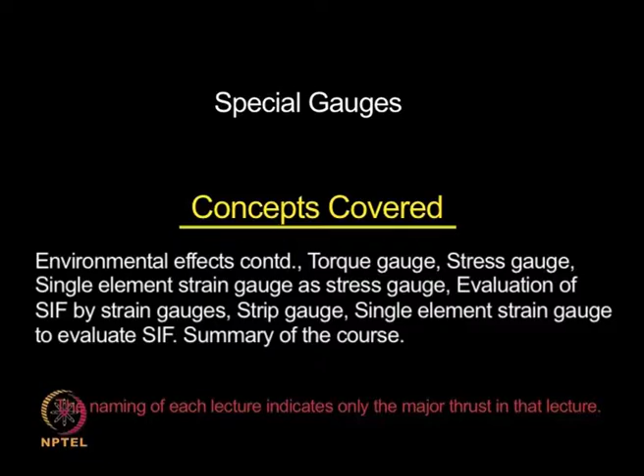We have been looking at finer aspects of strain gauge instrumentation systems. In the last class we looked at how to account for transverse sensitivity in a general case, then how to effect these corrections in the case of a T rosette, rectangular rosette, as well as delta rosette. Then we moved on to how to make strain measurements under hydrostatic pressure, nuclear radiation, temperature extremes, and cyclical loading, and finally we looked at environmental effects.

I said water is elixir of life, but water is very bad for strain gauge installation. We saw strain gauge installation needs to be protected against moisture. So when you learn that it has to be protected against moisture...

One of the simpler approaches is to apply a thin layer of microcrystalline wax or an air drying polyurethane coating, and this is good enough for laboratory measurements where your readout time is essentially short.

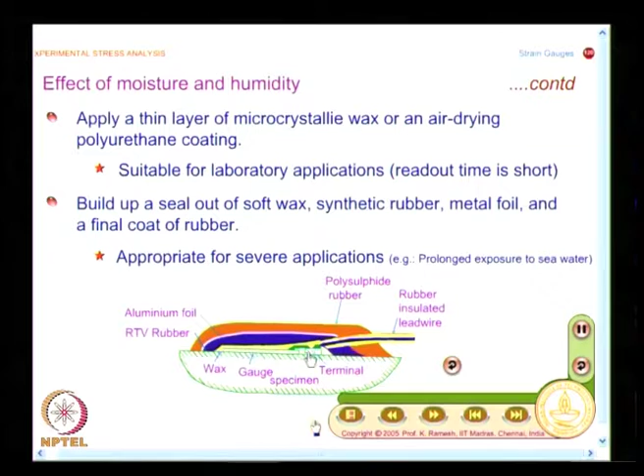I would like you to have a neat figurative sketch of this. So what you essentially have is, on the specimen you have the gauge, then a coat of wax, then a coat of rubber, then aluminum foil, and a final coat of polysulfide rubber. This also you can see as animation where you see one layer after the other.

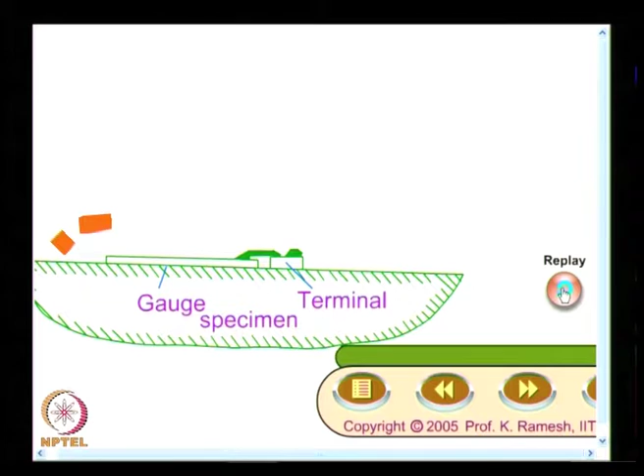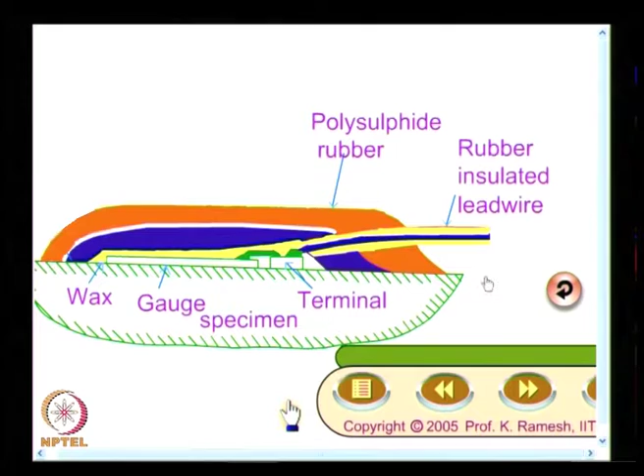Now we move on to an interesting class of special gauges. First we take up plane shear or torque gauge, and what we are going to do here is look at a very generic arrangement. In this you have two strain gauge elements oriented at angles theta A and theta B, and you have the reference axis as x and y.

So you have one strain gauge element measuring strain along theta equal to theta A, and another strain gauge element measuring strain along theta equal to theta B. We will develop the equation for a very generic arrangement first, then substitute specific values of theta A and theta B and simplify.

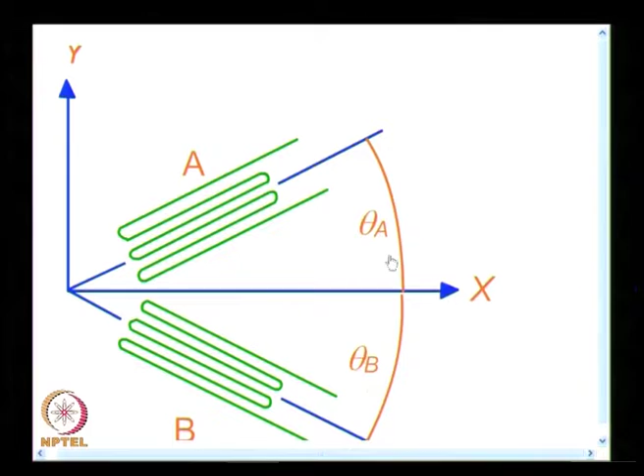In all these approaches, I have said you need to know the strain transformation law. If you know that, analysis of strain gauge data is very simple. Here the strain transformation law is written down in terms of cos 2 theta and sin 2 theta, instead of cos square theta, sin square theta in that form; we have written it in another convenient fashion.

So when I have a strain gauge oriented at theta equal to theta a, epsilon a is given as epsilon xx plus epsilon yy divided by 2, plus epsilon xx minus epsilon yy divided by 2 into cos 2 theta a, plus gamma xy divided by 2 sin 2 theta a.

And you simply replace theta a with theta b in the second expression, and my focus is to find out the shear strain.

So from these two expressions I can solve for the shear strain gamma xy, and that is finally given as gamma xy equal to 2 into epsilon a minus epsilon b, minus epsilon xx minus epsilon yy multiplied by cos 2 theta a minus cos 2 theta b, divided by sin 2 theta a minus sin 2 theta b.

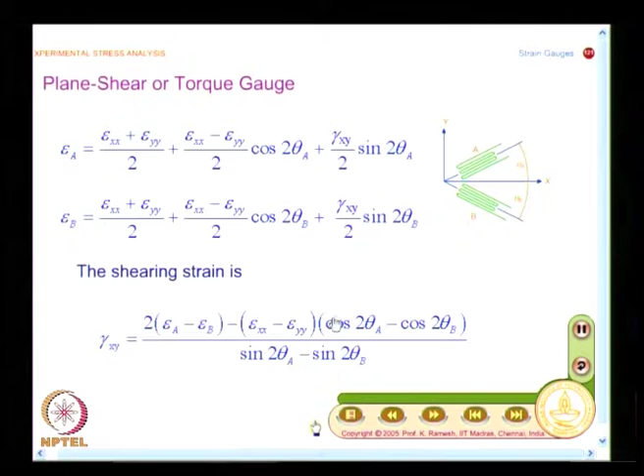What I am going to do is take the first step: I will make theta a equal to theta b in magnitude, and if I have theta a equal to minus theta b, then you will find cos 2 theta a minus cos 2 theta b will go to 0. So you will have only one term in the expression for gamma xy.

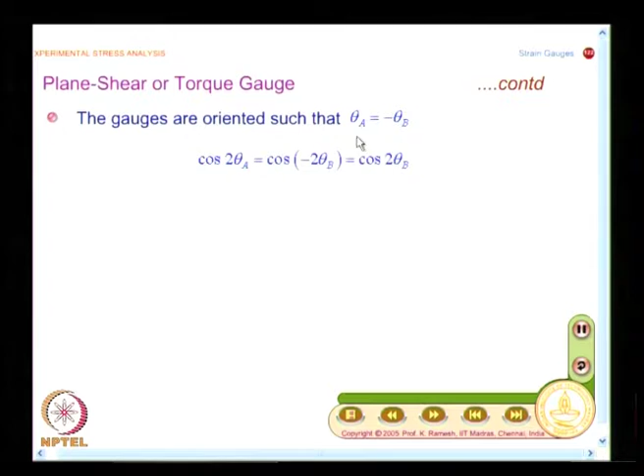So when I have theta a equal to minus theta b, I get gamma xy as epsilon a minus epsilon b divided by 2 sin 2 theta a.

In normal strain gauge measurements, you connect one strain gauge to a Wheatstone bridge. Only in special applications you may connect more than one strain gauge. Suppose I use a delta rosette or a rectangular rosette.

Essentially, I would connect each strain gauge in a rosette to separate Wheatstone bridges for strain measurement. Now here, what you are looking at is, I will connect two strain gauges, they may form a T rosette, and when connected on adjacent arms, we have already seen adjacent arms cancel each other. If the angles are oriented at theta a equal to minus theta b, connecting two strain gauges on adjacent arms of the bridge automatically gives you epsilon a minus epsilon b.

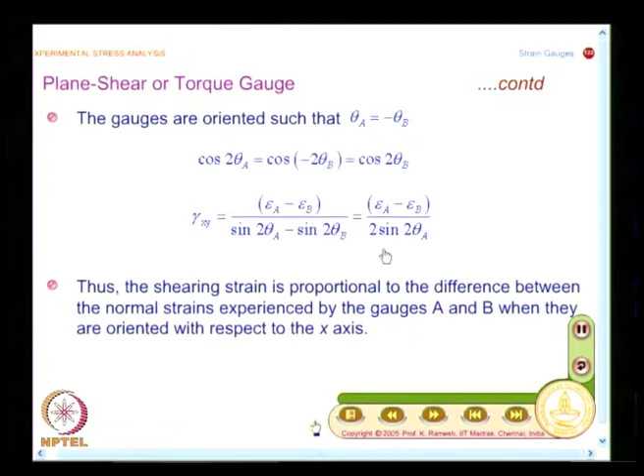So what you essentially get is the shearing strain at the point of interest. I can take a very special case when I keep theta a equal to 45 degrees, I get a much simpler expression, and that is how most of these popularly available strain gauges are oriented. So what I get is gamma xy equal to epsilon a minus epsilon b divided by 2.

So I have a T rosette and I connect the two elements of this to one Wheatstone bridge. This is a special application. Here we are not measuring the state of strain at the point of interest, we are interested only in finding out shear strain, nothing else. In such a case, you can connect elements of the rosette to appropriate arms of the Wheatstone bridge. So this is a special application, it is not a general rule.

In a generic case, you will connect each strain gauge to a Wheatstone bridge. Only in transducer applications, where you design your spring element and know the state of strain on it, your focus is to measure force. In order to amplify the signal, you try to have a minimum full bridge configuration.

So you have to distinguish, in strain gauge instrumentation, how to connect the strain gauges and how many channels you require. You need planning, and you need to bring in concepts of strength of materials, so that you place the strain gauge properly on the structure as well as connect them correctly in your Wheatstone bridge. So do not assume that because in one class we saw two strain gauges connected to a Wheatstone bridge, this applies for every other application.

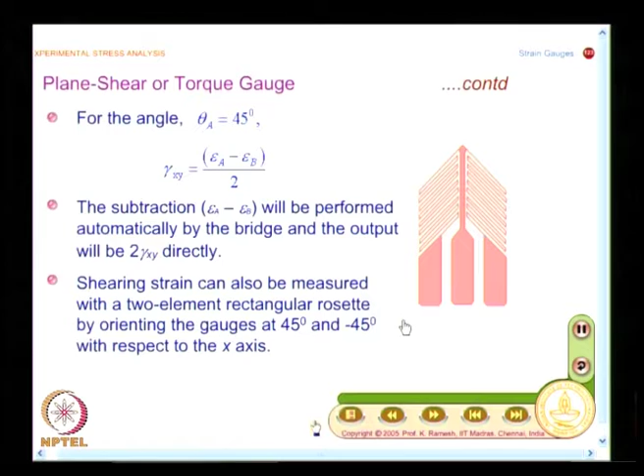You also have different configurations available. Instead of just 2 strain gauges, you have 4 strain gauges oriented at 45, minus 45, 135, and so on. Here you will get 4 times the signal, and these are all special gauges which can be used to measure the value of torque. If you calibrate it properly, you can also measure the torque applied to the structure. So in these applications you will connect all these strain gauges appropriately in a single Wheatstone bridge.

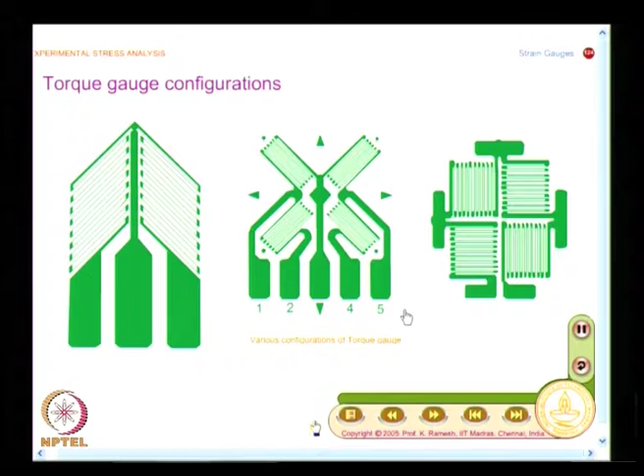We have seen how to measure shear strain. People also asked a question. In basic stress analysis, we are only looking at evaluation of stress components, so why not also design a stress gauge instead of a strain gauge? The focus is that whatever measurement I get should be proportional to stress, then it becomes a stress gauge.

We have looked at transverse sensitivity effects as a nuisance, and I said what you considered a nuisance in one application can become beneficial in another. That is the case with friction. Without friction you cannot walk on the street, and you need to minimize as much friction as possible in many of your rotating components. And if you do not have friction, you cannot apply brakes.

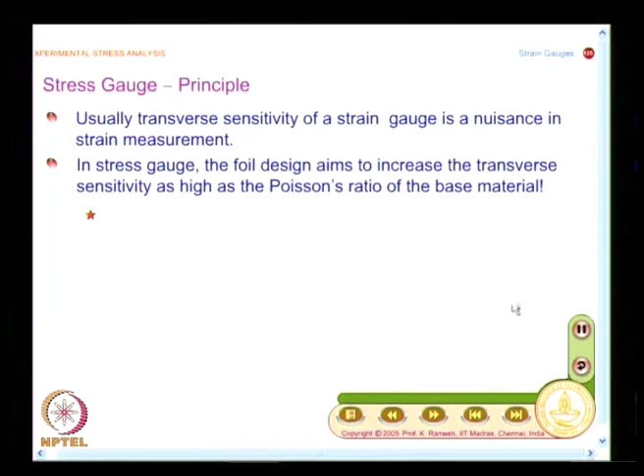So friction is advantageous as well as disadvantageous. On similar lines, we will see in the design of the stress gauge how we play with the transverse sensitivity. In fact, we would like to have maximum transverse sensitivity so that a given strain gauge functions like a stress gauge. Transverse sensitivity of a strain gauge is a nuisance in strain measurement, but in a stress gauge, the foil design aims to increase the transverse sensitivity as high as the Poisson's ratio of the base material.

So what happens is, in view of this, the stress gauge will be different for different specimen materials. This we have already accepted in strain gauge technology. We have looked at self temperature compensated gauges, and all these are meant for a particular specimen material. So we are accustomed to this kind of scenario in strain gauge technology, and you extend a similar argument for the development of these special gauges too.

I have given the result in advance, but we will see how the result is arrived at. So, let us look at the expression for delta R by R, what we looked at earlier.

We will recall here, that is given as S A into epsilon A plus K T into epsilon T. We have not written it in terms of S G, we have written the generic expression here.

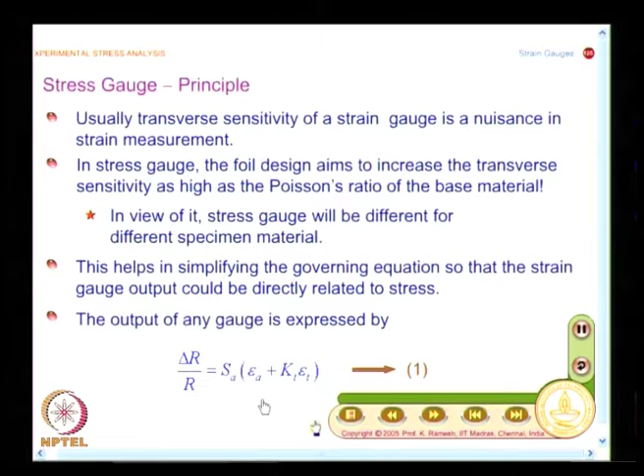And now we are essentially trying to find out the state of strain or state of stress on a free surface, and we consider that as a plane stress situation. So, I can replace the strain quantities in terms of stress components by invoking stress strain relations. That is what I am going to do.

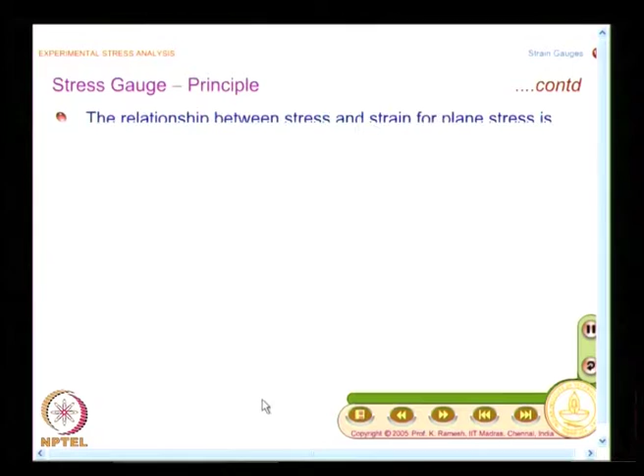So, when you look at the relationship, I have epsilon A equal to 1 by E into sigma A minus nu times sigma t, and epsilon t is given as 1 by Young's modulus E into sigma t minus nu times sigma A. When I substitute in the previous equation, I get delta R by R equal to sigma A into S A divided by Young's modulus into 1 minus nu k t, plus sigma t S A divided by Young's modulus E into k t minus nu.

So, delta R by R is a function of axial stress as well as transverse stress. Suppose I make k t equal to nu, this term vanishes.

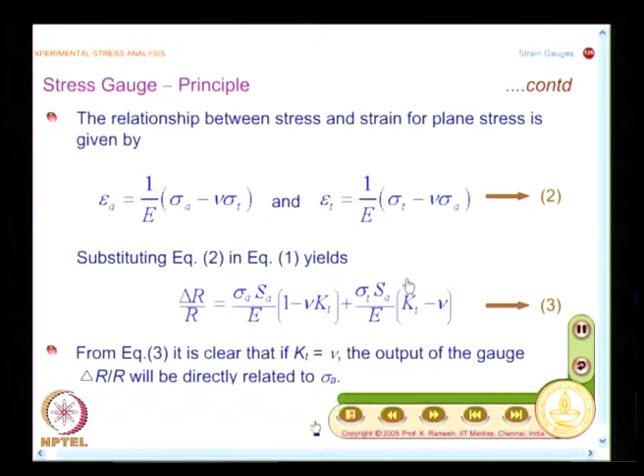So, what you are really looking at is, in a strain measurement system, I essentially measure change in resistance. Now, we have looked at delta R by R could be related to axial stress, provided the gauge configuration has a transverse sensitivity of a very high value equal to the Poisson's ratio.

See, we are not taking a wire and making a strain gauge now. We have the luxury of etching any pattern of my design on a metal foil. Because I have the etching process, I can design complicated patterns. In fact, the diaphragm gauge which you saw was a very complex pattern which was used to measure pressure.

So, now we will have to go and investigate what type of grid pattern I should design which will have transverse sensitivity of the order of Poisson's ratio. That is what we are going to look at.

So, look at this diagram very carefully, and there is a subtle difference between what we saw as a torque gauge and what we say as a configuration for the stress gauge. Here also I have two elements oriented at plus theta and minus theta, but the subtle difference is, these two elements are joined, they are not independent elements.

So, I have one strain gauge which is made in a fashion having two elements which are joined. So, the whole thing is one strain gauge. So, I will have one tab here, I will have another tab here. This has to be connected to the Wheatstone bridge.

And I have also cautioned earlier, you must develop a familiarity by looking at a pattern what this gauge stands for. In fact, you will also be tested whether you have been able to identify strain gauge patterns of various types, that will be tested in your examination, and you should not get confused between a T rosette or two element strain gauge or a stress gauge. There is a subtle difference, the subtle difference you should understand. The elements are joined here, and this is how you have made a stress gauge.

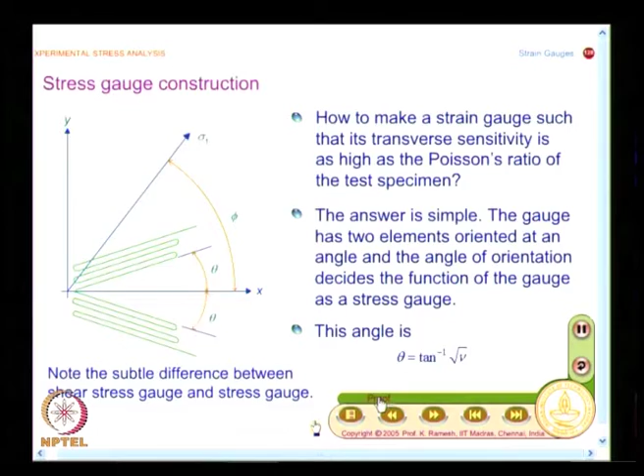And when I do the mathematical development, I will refer these two angles with respect to the principal stress as the reference. So, I will have one as phi minus theta, other one as phi plus theta, and again you have to go back and look at the strain transformation law. That is what I am going to do. These equations are not difficult, these equations you already know, only aspect is we are applying it for a different strain gauge configuration.

So, I have two elements that we are going to look at, because they are joined together essentially. I am looking at epsilon phi minus theta plus epsilon phi plus theta, that is what I am going to finally do. So, I will look at what is the expression for epsilon phi minus theta.

Since I have taken reference as the principal stress axis, I write it in terms of principal strains. So, epsilon phi minus theta equals 1 by 2 epsilon 1 plus epsilon 2 plus 1 by 2 epsilon 1 minus epsilon 2 multiplied by cos 2(phi minus theta). You can appreciate this because it is like a normal strain gauge which is sensitive to strain along the gauge length, so that you call epsilon phi minus theta.

Similarly, this is like another strain gauge which will measure strain along the gauge length, so that is denoted as epsilon phi plus theta. So, you change theta from minus theta to plus theta.

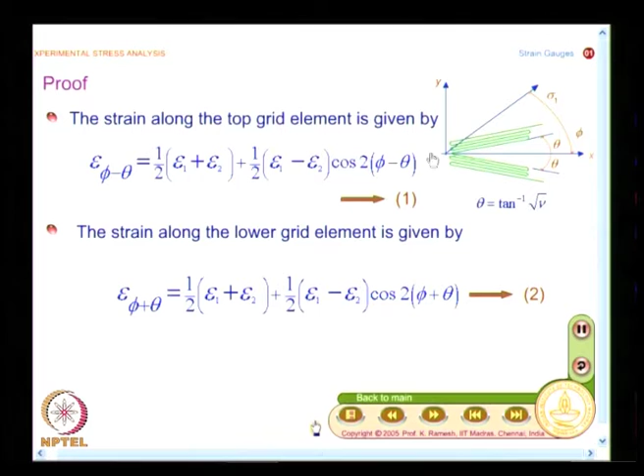In strain gauge instrumentation, we design complicated gauges, but finally we will also raise a question: can I do stress measurement with a single conventional strain gauge? If you look at the theoretical development, I have cleverly taken the principal stress axis as a reference. Note that if phi equals 0, the expressions for epsilon phi minus theta and epsilon phi plus theta will be exactly the same. Keep this result in mind, we will use it when I develop whether a single element strain gauge could be used to measure stress. So we will develop a complicated gauge pattern to start with. In an unknown situation you will do this, but you will also find out whether you could use a simple normal strain gauge for stress measurement.

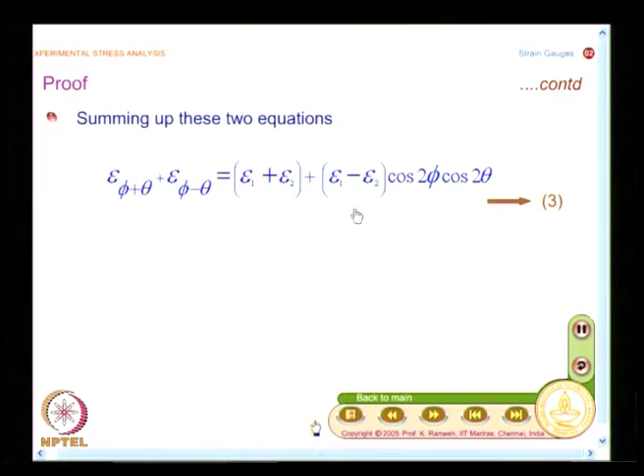When I add these two strain quantities, I get epsilon 1 plus epsilon 2 plus epsilon 1 minus epsilon 2 multiplied by cos 2 phi into cos 2 theta. I will further simplify, my focus is finally to get the addition of these two strains proportional to a single stress component, that is what I am going to show. We will not evaluate the angle theta, but we will say theta equals so and so, and then simplify the expression.

Then we will say take theta equal to tan inverse root of nu, as we have said, and we will do it by induction. We also know from Mohr's strain circle that epsilon xx plus epsilon yy equals epsilon 1 plus epsilon 2, and epsilon xx minus epsilon yy equals epsilon 1 minus epsilon 2 into cos 2 phi, and we will replace it in terms of epsilon xx and epsilon yy.

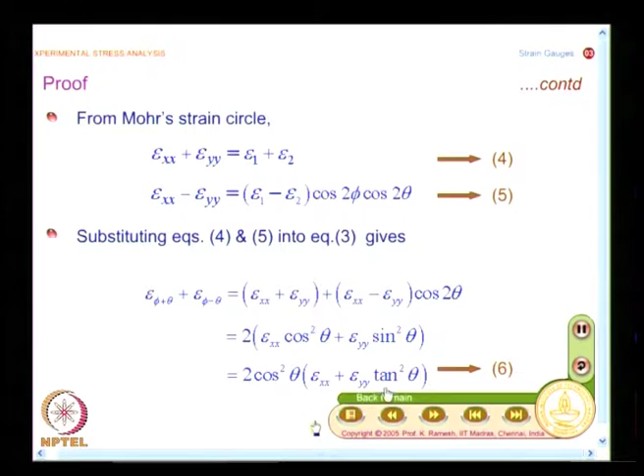So, when you substitute these into the earlier equation, I get epsilon phi plus theta plus epsilon phi minus theta as epsilon xx plus epsilon yy plus epsilon xx minus epsilon yy cos 2 theta, and finally it simplifies to 2 cos squared theta times epsilon xx plus epsilon yy tan squared theta. What we have done is simplify the expressions the way we want. The focus is for what values of theta this expression gets simplified, and that is what we will take up now.

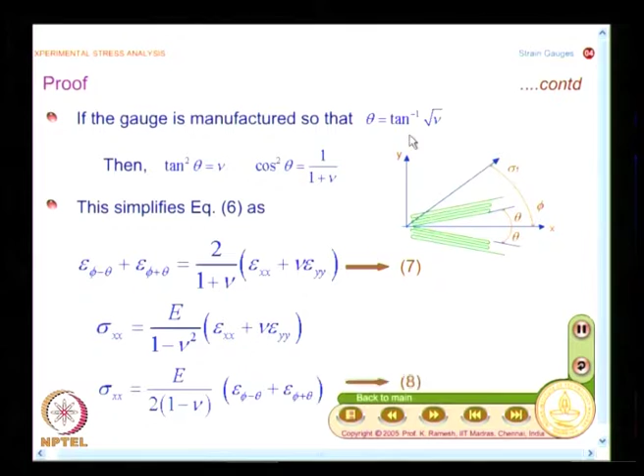We start with the premise that if the gauge is manufactured so that theta equals tan inverse root of nu, I specify what is the expression for theta. So when I take theta equal to tan inverse root of nu, I get tan squared theta equal to nu and cos squared theta equal to 1 by (1 plus nu), and this simplifies epsilon phi minus theta plus epsilon phi plus theta equal to 2 by (1 plus nu) times epsilon xx plus nu times epsilon yy.

And I get an expression for sigma xx as Young's modulus E divided by (1 minus nu squared) multiplied by (epsilon xx plus nu times epsilon yy). So I finally get sigma xx related to epsilon phi minus theta plus epsilon phi plus theta through the factor E by 2 into (1 minus nu). What we have seen is, I have two elements joined together, and when you connect this in one arm of the Wheatstone bridge, I measure essentially the sum of these strains. Now I have an expression to find the normal stress sigma xx directly from strain measurement, so I call it a stress gauge, only the multiplication factor has to be reset in your instrumentation system.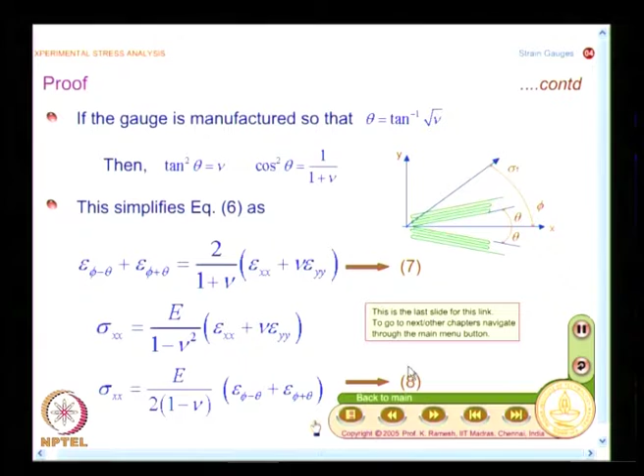I am not going to stop here, you cannot run for a stress gauge. We have also seen the stress gauge is dependent on the base material because of the factor Poisson's ratio. Because I have the factor as Poisson's ratio, it depends on the base material. So I need to develop how to use a single element strain gauge as a stress gauge.

See, all this are gimmicks, once you have understood something, you orient it at a particular angle and get the result you want. For this, I need to know the principal stress direction. Without knowing the principal stress direction, I cannot use a single element strain gauge to measure stress. There are certain applications where you can minimize the number of channels by just pasting one strain gauge appropriately.

If your design demands a stress quantity along a particular direction, then your job is done. So the prerequisite is I need to know the sigma 1 direction, and I will have to align a simple normal strain gauge at theta, where theta is given as tan inverse root of nu. We have already noted, when phi equals 0, epsilon phi minus theta equals epsilon phi plus theta, that is equal to epsilon theta. So your final expression reduces to sigma 1 equals E by 1 minus nu, times epsilon theta.

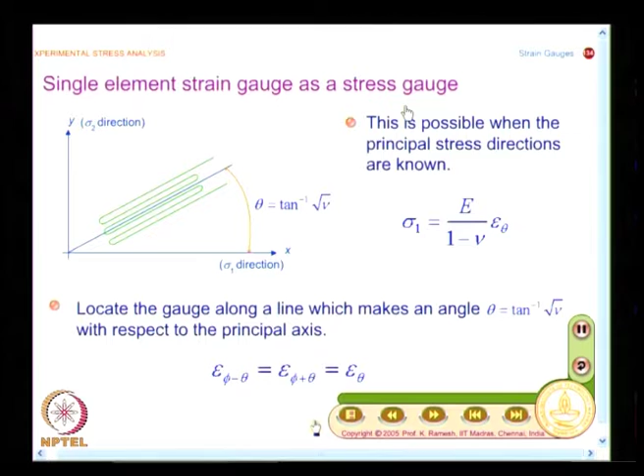So now you have a via media. If somebody asks you why are you doing only strain gauge, you can say no, I can also develop a stress gauge. This is one of the very common questions in interviews - people can ask, do you know what is a stress gauge? You should not stay quiet, you should say that there is a way to do it.

These are all recent developments. People played with metal foil where you have to etch. If they had to live with the wire, probably they would not have proceeded in this direction, because you have the facility to etch any pattern of your desire, whatever design you have, you are in a position to explore and find innovative methods to improve your measurement.

And what we have done here, if you look at the stress gauge, we have selected a particular parameter so that one of the terms becomes zero. You have this idea borrowed even in fracture mechanics. My next focus is to find out how to get the stress intensity factor using strain gauge technology.

First we will see a very elaborate method, then we will simplify it. In order to simplify, we have to knock off terms, and we are going to knock out 2 terms in a series. So I will have to work with theta as well as alpha. In this case we have to knock out only one term, so we decided that we will align it at angle theta.

So the ideas are similar, people also played with Poisson's ratio. Once you have got the Q, researchers try in that direction and find out how this can be further exploited. So you would see Poisson's ratio is effectively utilized in the calculations, and the orientation decides the functionality of the strain gauge, and I have to knock out 2 terms, theta as well as alpha. That is the way I am going to go about it.

But before we go into it, we will also recall what we have learned in our course on fracture mechanics. What is the stress intensity factor? Essentially, the stress field in the vicinity of the crack is possible to write in terms of the stress intensity factor, and you may have multiple cracks in a system. The crack that is critical is going to propagate, and fracture mechanics says that when K1 is greater than the fracture toughness, K1C, the crack will be initiated.

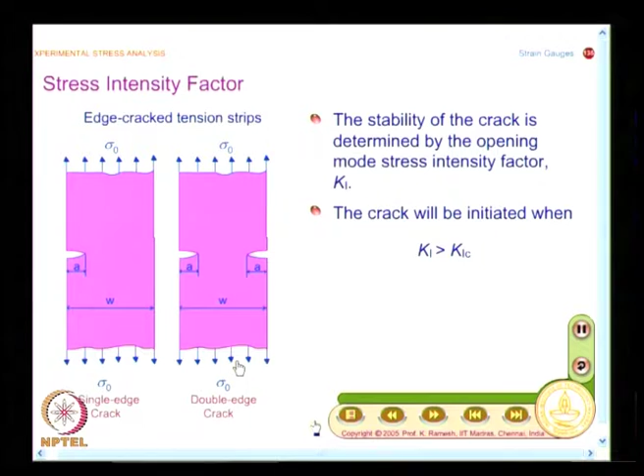So the focus is, for a given structure you need to find out what is the stress intensity factor. Here we are essentially looking at a simple mode 1 situation. So the idea is, there are occasions where you need to experimentally find out what is the stress intensity factor.

There are many methods: you can do it by numerical methods, by method of caustics, by method of photoelasticity, by method of Moire, holography, and we will learn how strain gauge technology could be used. So what do I need to do?

Now you all know I am going to paste a strain gauge at an arbitrary angle. So I need to find out, for an arbitrary angle, what is the expression for strain. If I know the expression for epsilon xx, epsilon yy and gamma xy, I can write down the strain expression along any axis of interest. That is not a difficult aspect.

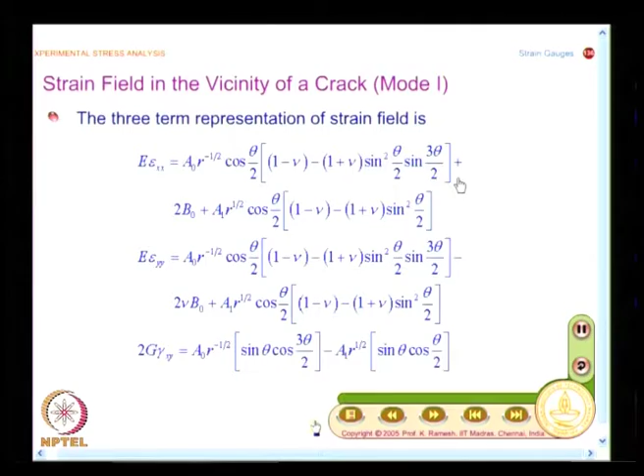So essentially you have to look at the strain field, and in order to have reasonable accuracy I am taking a 3 term solution. I can write an infinite number of terms, but those terms I will not be in a position to evaluate, and you should also not stop at only the first term. So in order to enhance accuracy we want to take as many terms as possible, and the methodology should also be simple enough to measure.

So my focus is to bring in 3 terms, but knock off 2 terms intelligently by selecting appropriate angles. That is what I am going to do.

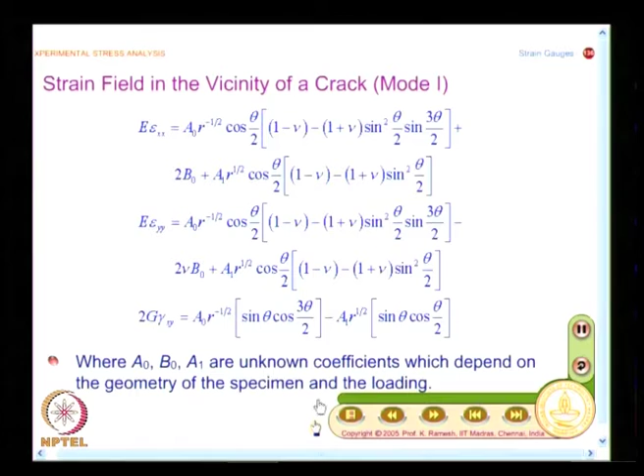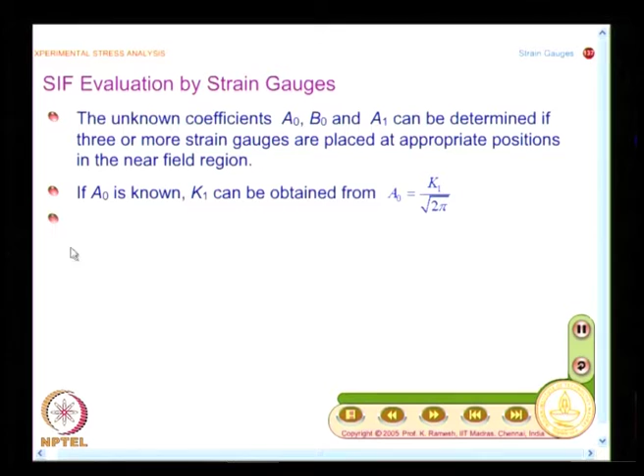This is what is summarized here: you have A naught, B naught, A1 as unknown coefficients which depend on the geometry of the specimen and the loading, and we will knock off other terms leaving only A naught. If A naught is known, K1 can be obtained from A naught equal to K1 by root of 2 pi. This is what I am going to aim at.

And if you are confronted with a situation like fracture mechanics, what you would like to do is measure at several points in the vicinity of the crack tip, find out strain quantities, and in such a case you normally have to paste strain gauges at different locations.

And even to solder and connect and paste, all these are very complex issues. But the advantage is you are able to get strain at short distances very comfortably.

So I can essentially get the strain field, and in fact people have developed methodologies using strip gauges to find out the strain field and solve this in an over-deterministic fashion using the principle of least squares, and you can actually evaluate several terms in the series and finally evaluate only the stress intensity factor.

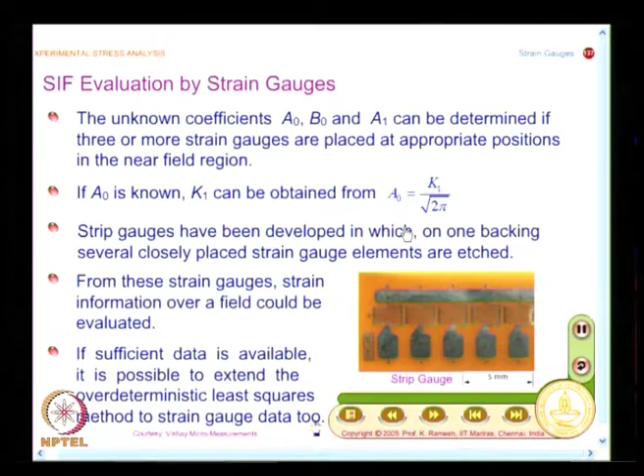So you could satisfy the strain field information by pasting several strip gauges in the near vicinity, but the very thought is so difficult, because it is available as one backing - pasting may be simpler, but soldering is going to be a very tricky issue.

That is where you will find that whole field techniques are better. When I have to get field information, whole field techniques are a lot more better, but you also need to have a via media. When I use a strain gauge, is it possible to get the strain field? If you ask that kind of question, in principle it is possible, but you have to take a lot of effort to do that.

And this is where researchers have stepped in and played with the equations and found a very simple approach where a common general purpose strain gauge, a single strain gauge, could be used to find out the value of K. How elegant it is, we will have a look at it.

The idea here is the number of strain gauges required for the determination of K1 can be reduced to 1 by appropriate choice of strain gauge location and orientation. Essentially my interest is to knock off B naught and A1 terms. So I look for two orientations. You are trying to find strain along a particular location which is at an angular location, and at that location you measure strain along a particular orientation. So I have two parameters to play with, and I can have the governing equation only as a function of A naught.

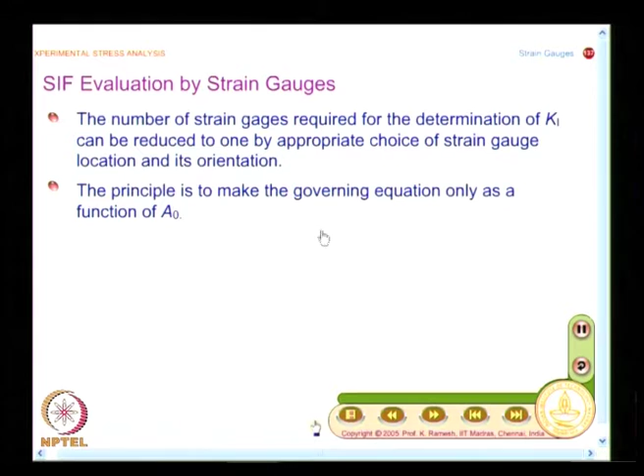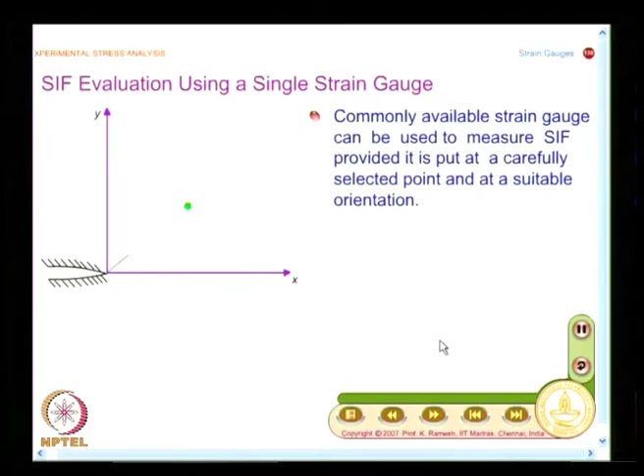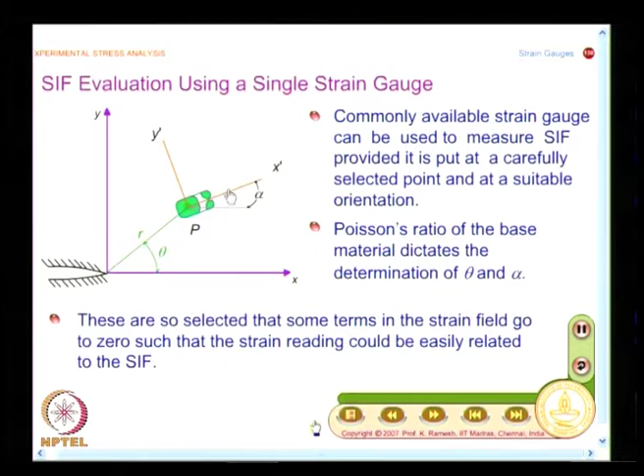Look at the animation carefully. What I am going to do is use the common strain gauge. I will have the orientation theta, but at orientation theta I will have the strain gauge aligned at angle alpha. For this value only I would find the strain along this direction, and now the question is how to select theta and alpha. That is what we will look at.

Make a neat sketch of this diagram that illustrates how to use a single strain gauge for stress intensity factor measurement. I have this as the crack tip, taken as the origin, and you locate the point P which is at an angle theta from the crack axis. At point P you measure strain along the direction alpha, that is very important.

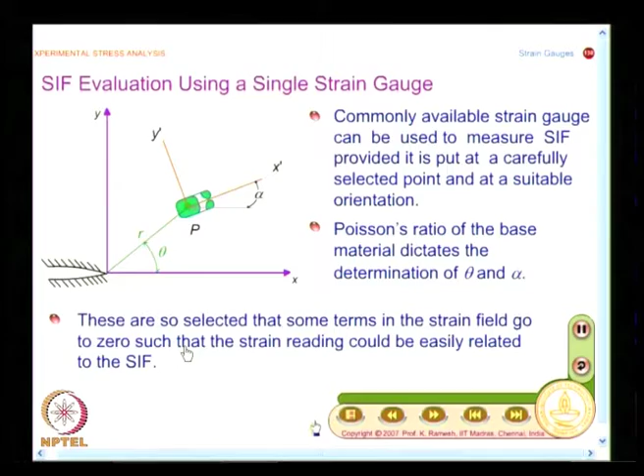I have already given you the clue, we have the Poisson's ratio of the base material which was used in designing the strain gauge. We will extrapolate those ideas and use the Poisson's ratio of the base material to find appropriate values of theta and alpha, so that some terms in the strain field go to zero. You have to evaluate theta and alpha intelligently to knock off the terms containing B naught and A1.

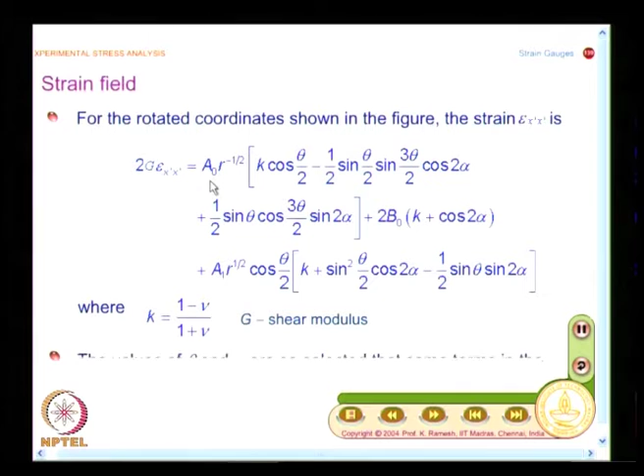So I will have an expression only in terms of A naught, then I can find the stress intensity factor from that. For this I need to know the strain along any arbitrary direction. This expression you can write down: 2G into epsilon x prime equals A naught r power minus 1 by 2 multiplied by kappa cos theta by 2 minus 1 by 2 sin theta by 2 sin 3 theta by 2 into cos 2 alpha, plus 1 by 2 sin theta cos 3 theta by 2 sin 2 alpha, plus 2 B naught k plus cos 2 alpha.

Now you have a clue how to find alpha. This should be minus kappa. If I have this as minus kappa, then this term will go to zero. So find alpha and then find theta, that is how you play with the equations. I have this as plus A1 r power 1 by 2 into cos theta by 2, kappa plus sin square theta by 2 cos 2 alpha minus 1 by 2 sin theta sin 2 alpha.

Once you look at the expression for the strain, for the strain gauge which we have pasted, we have it in terms of theta and alpha, and you get a clue how to get the values of alpha as well as theta. Kappa is given as 1 minus nu divided by 1 plus nu, and g is the shear modulus.

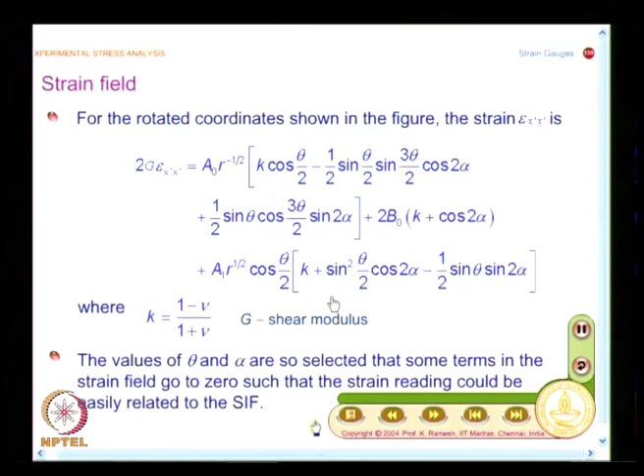Whatever development you have done in strain gauge, playing with the Poisson's ratio and orienting the strain gauge appropriately, that kind of approach is extrapolated in the measurement of stress intensity factor also. Once you strike an idea, you also find out whether this idea can work in other situations.

Now I have an expression, I can go and find what is the expression for alpha and theta. We have cos 2 alpha equal to minus kappa, so you have minus of 1 minus nu divided by 1 plus nu. So I can find the value of alpha, and if you look at the expression for A1, that vanishes if angle theta is selected such that tan theta by 2 equals minus cot 2 alpha.

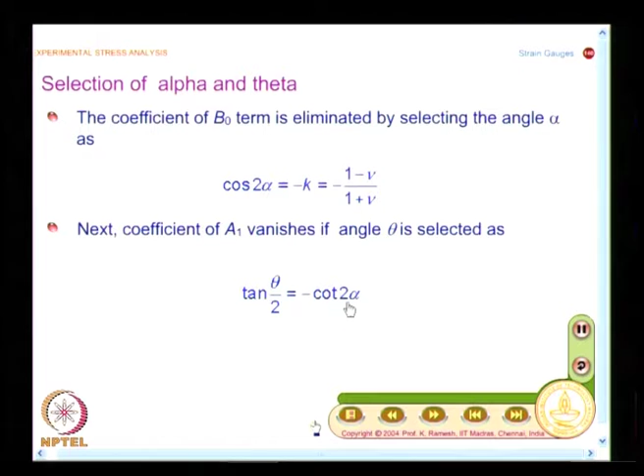See, you have the strain expression, and when you substitute these values of alpha and theta, you will find it is only a function of A naught; the terms containing B naught and A1 are cleverly knocked off. So, you play with the angles and you are able to do it.

These are all finer aspects of strain gauge instrumentation. When you normally place a strain gauge, you are only measuring strain along a particular direction. Whatever strain you measure is intelligently related to the stress intensity factor by your understanding of the strain field expression. And if alpha and theta come out as 22.32 degrees and 32.5 degrees, nobody will use it.

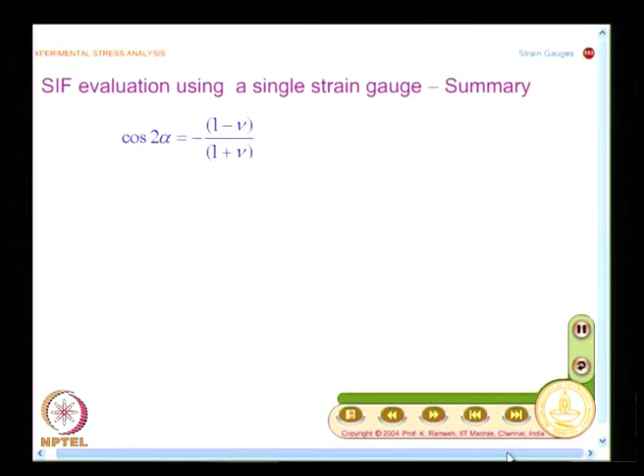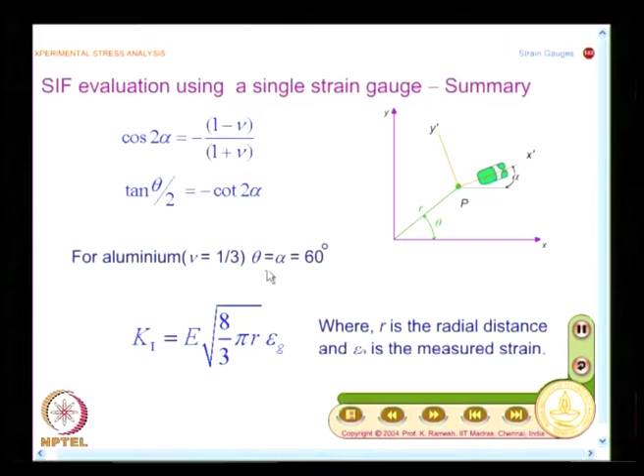See, people find this a great use mainly because the most popular aerospace material is aluminum. For aluminum, both angles reduce to 60 degrees. It makes your life very, very simple. So, that is what we will see now. When I have aluminum, nu equal to 1 by 3, and theta and alpha go to 60 degrees. The angle is very important. If the angle is not possible to achieve, this technique would not have taken off. And aluminum is the one used in space structures. All aerospace structures, that is where maximum experimentation is done, because safety is a very important aspect. And you find, fortunately, the values of theta and alpha are as simple as 60 degrees.

This is a generic arrangement. You have to look at theta as well as alpha in a generic situation, and when I have this, the final expression is also available. So, what I have here is k1 equal to Young's modulus E into root of 8 by 3 pi r, epsilon g, where epsilon is the strain along the particular direction.

For the case of aluminum, this is measured for the values of theta as well as alpha equal to 60 degrees. For steel, you will have to find out theta and alpha, because knowing the Poisson's ratio, you can find out what is theta and alpha. So, if you orient this, then you have an expression for the stress intensity factor.

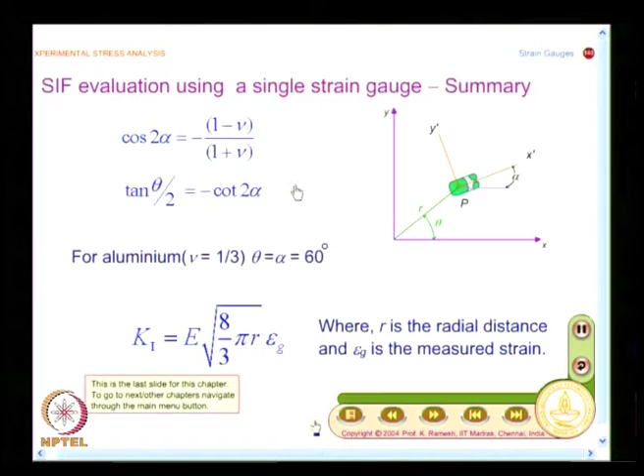So, with this we come to the close of this course, and we will also have a look at a brief overview of what we have been discussing in various chapters.

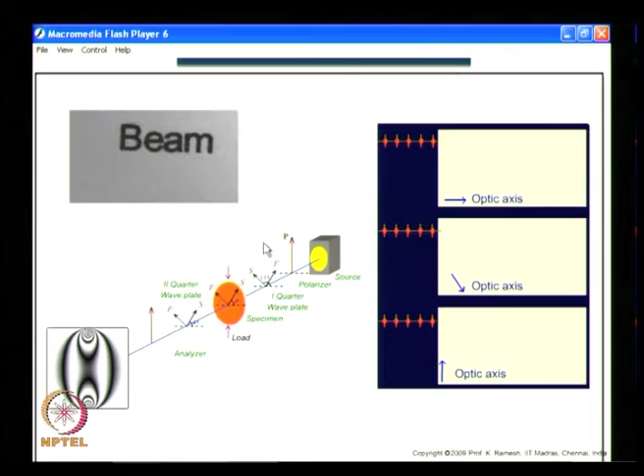We started with transmission photoelasticity. The key concept was that when you have a model that is loaded, it behaves like a crystal when it is loaded. When the loads are removed, it behaves like a normal material, and a crystal exhibits a property of birefringence, which is exploited in photoelasticity, allowing you to view fringe patterns in different optical arrangements.

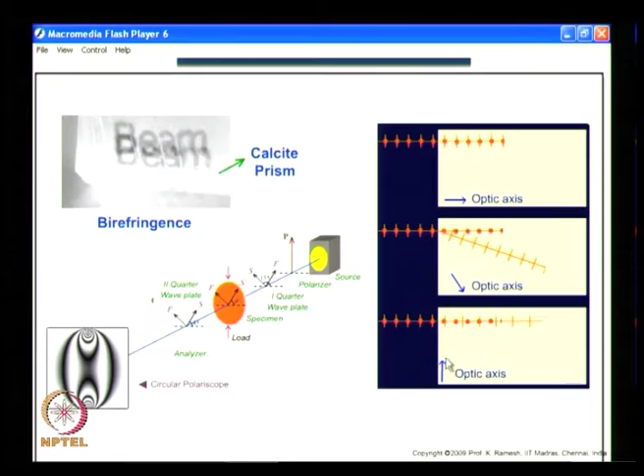Here you have a circular polariscope, where both a dark field and a bright field are possible, and we also discussed how the incident light should be oriented with respect to the optic axis of the crystal. When it is perpendicular, it is useful in photoelasticity, and when you have an incident ray, you get two refracted rays traveling with different velocities.

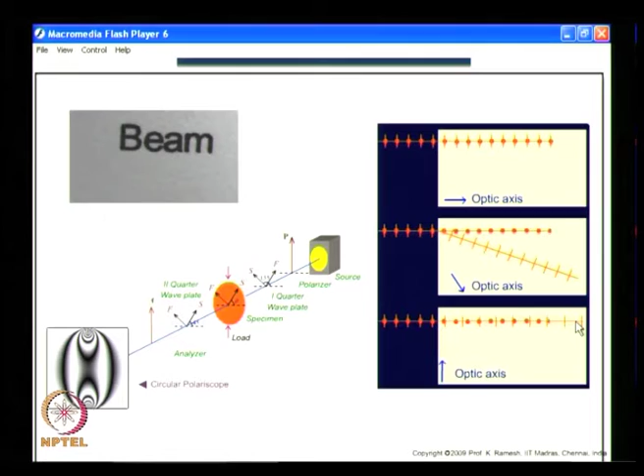So that is the basic physics in transmission photoelasticity, and we said we also need methodologies to analyze prototypes, which was discussed in photoelastic coatings. I said all the coating techniques share a commonality. We have photoelastic coatings, brittle coating, and to an extent you can also think of strain gauge as a coating applied on the material, and one key concept is that the strain in the prototype is faithfully transferred to the coating.

In the case of photoelastic coating, you have a thickness of the order of 3 millimeters pasted on, so you necessarily need what are known as correction factors.

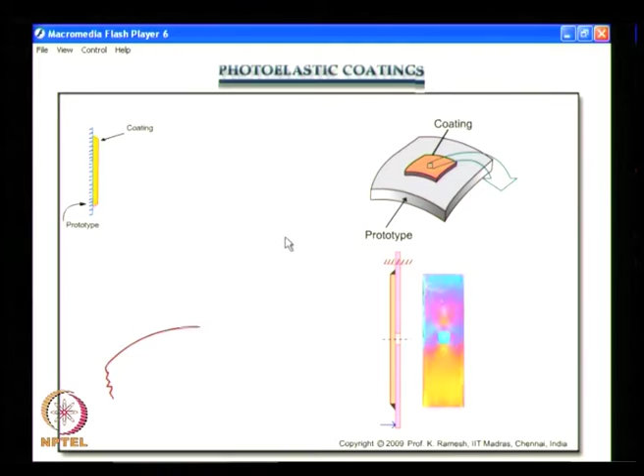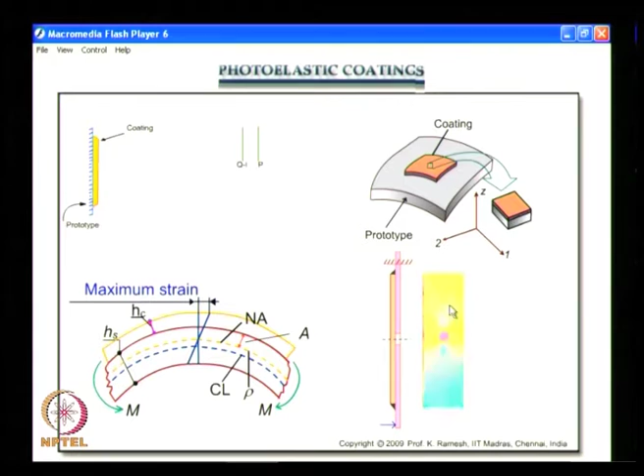Being an industry friendly technique, engineering is approximation, and approximation starts right at the data collection stage in reflection photoelasticity. You do not have a normal incidence, you have only an oblique incidence, and you want to minimize this angle of oblique. So you keep the polariscope at least 2 to 3 meters away from the specimen, and you see rich fringe patterns that are possible to interpret for stress information.

Then we moved on to another aspect of photoelasticity which is becoming very popular these days, known as digital photoelasticity. In the initial stages, algorithms were developed to thin the fringes, known as the global fringe thinning algorithm. It employed scans at 0 degree, 45 degree, 90 degree and 135 degree, and logical operators were used to get the skeleton free of noise.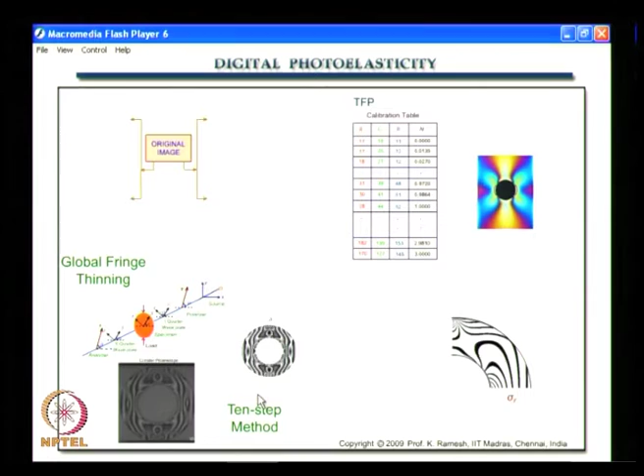And when you want to do whole field analysis, what is possible now is the employment of what is known as a 10-step method, which assures you high quality isoclinic data as well as isochromatic data, and these highly accurate values are needed for stress separation studies.

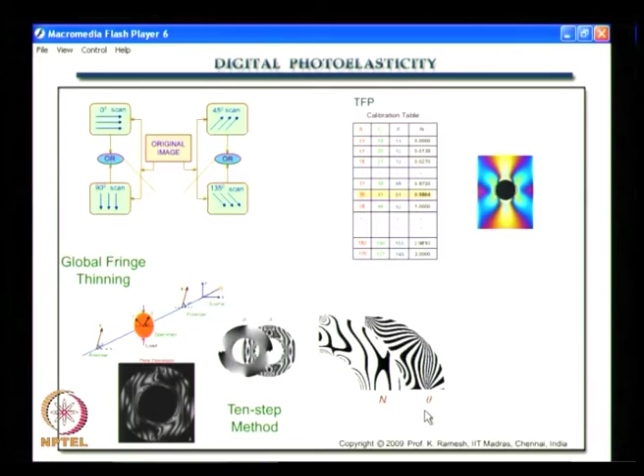We have not looked at in detail how to separate the stresses, but if you know n and theta, you have methodologies available to get sigma x, sigma y as well as tau xy. So what you have here is modern methodologies that not only find n and theta accurately at every point in the domain, but you can also post process them and even go to the extent of separating out the stresses.

And what we have found is, among various phase shifting techniques, the 10-step method is found to be robust, and a commercial polariscope could be used to record the 10 images. Normal misalignments do not have much influence in the 10-step method.

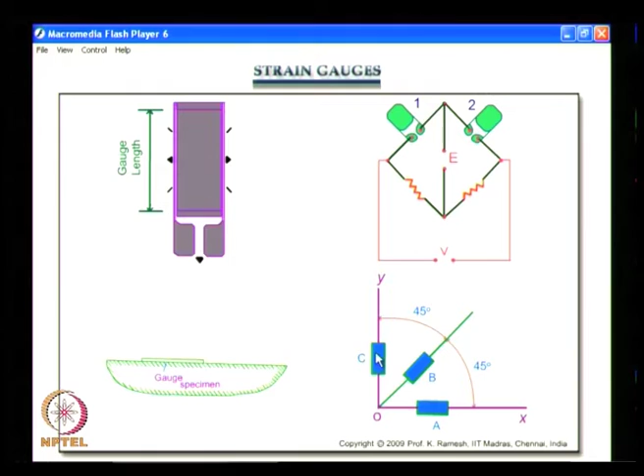Then we looked at the method of strain gauges, and I said a strain gauge measures strain along the gauge length, it is only measuring a component of strain. For measuring the change in resistance, the popular instrumentation is the Wheatstone bridge, and if you have to measure the state of strain at a point, you need 3 strain gauges, pre-aligned and available in one carrier known as a rosette.

We discussed various finer aspects of strain gauge instrumentation, and finally looked at how moisture is very bad and needs to be protected. So you have multiple layers formed with a layer of wax, then a layer of rubber, then aluminum foil, and finally another layer of rubber.

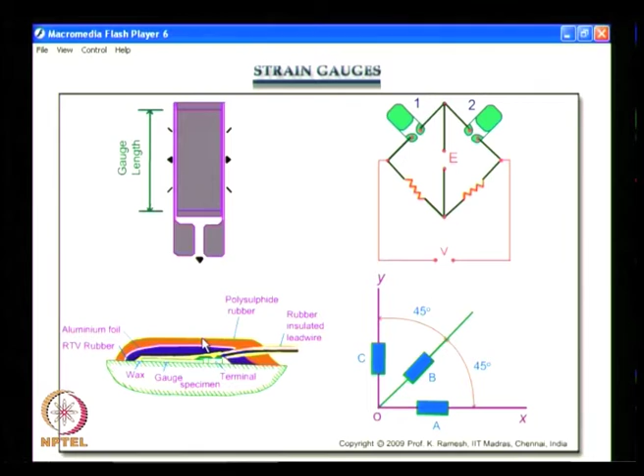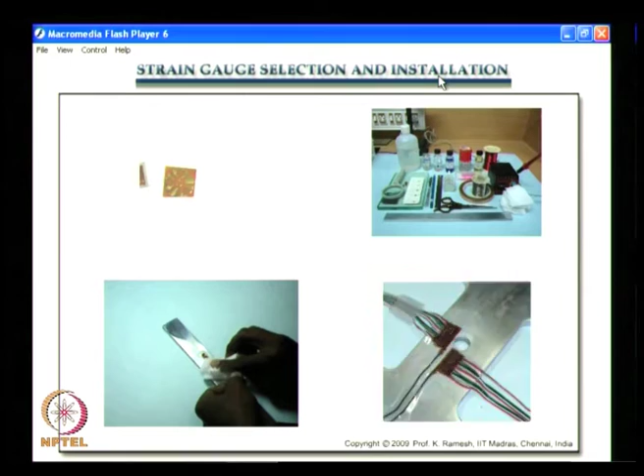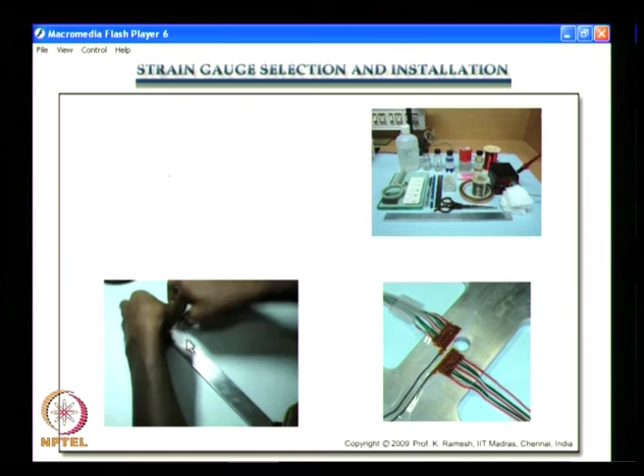For any strain gauge instrumentation, strain gauge selection and installation is very crucial. We saw that a variety of patterns exist and there is a very elaborate kit available, and a procedure for how to apply the bonding. A simple cyanoacrylate cement gets cured by thumb pressure, as illustrated here, where you press it with a gauze sponge.

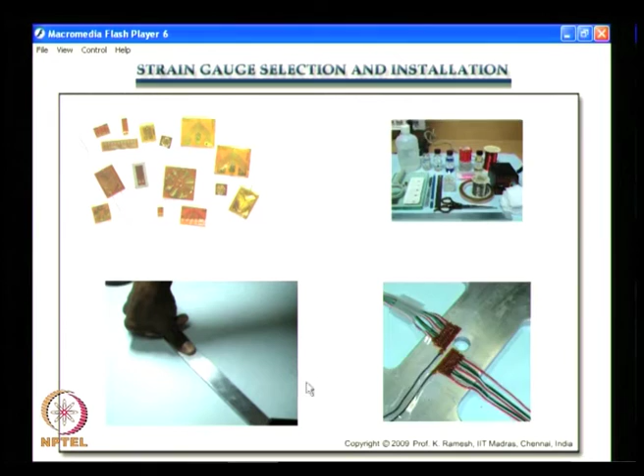And you put it with thumb pressure, and after about 2 minutes the bonding is completed. This shows the use of strain gauges. Finally, we come back to what we learnt in the first slide. The focus is that I can get stress information, displacement, slope as well as curvature when I say stress analysis, and what this slide shows is that for every experimental technique there is a physics behind it, and this physics needs to be understood for you to interpret the results.

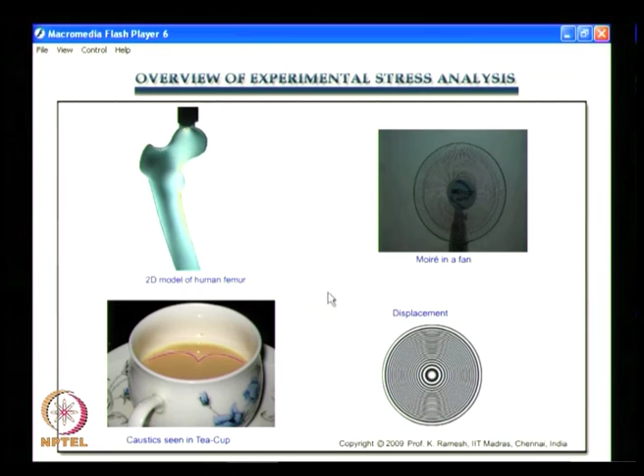So that is the focus. I see a caustic cusp here and I see a beautiful play of moire in the case of a fan. So you need to have physics understanding of experimental methods. Whenever they come across any new physical phenomena, they try to develop a new experimental technique. Thank you.